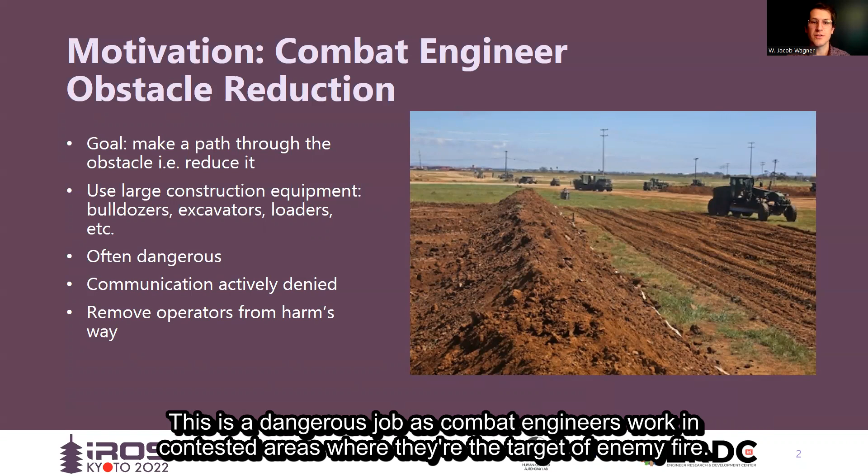This research is motivated by the needs of Army combat engineers who perform a variety of construction and demolition tasks, often using large construction equipment such as bulldozers. This is a dangerous job as combat engineers work in contested areas where they are the target of enemy fire. Teleoperation can reduce the risk to equipment operators.

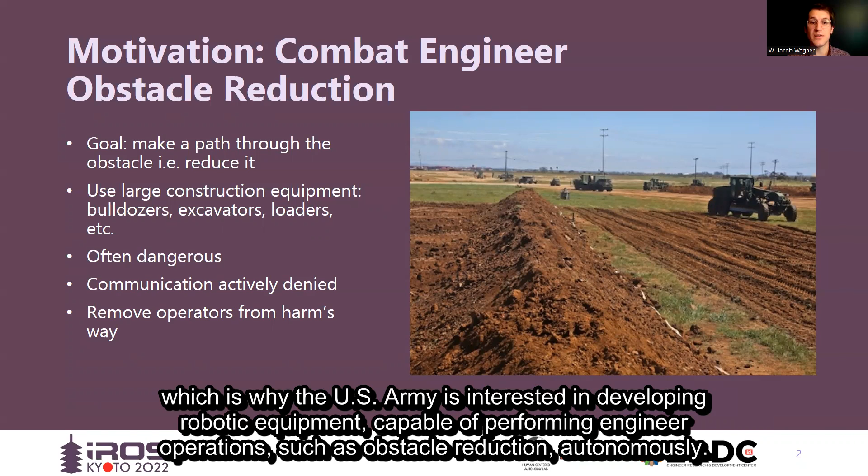However, it may not be possible when communications are being actively denied, which is why the U.S. Army is interested in developing robotic equipment capable of performing engineer operations such as obstacle reduction autonomously. Specifically, we focus on the task of earthen berm removal, an example of which is shown in the photo.

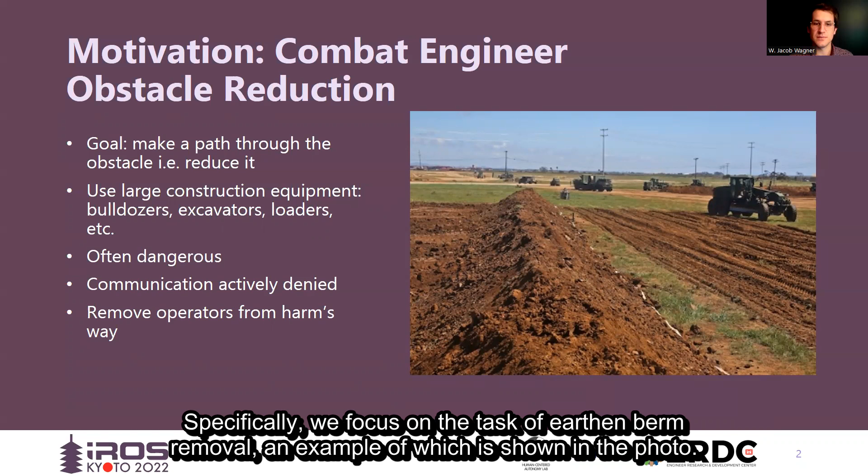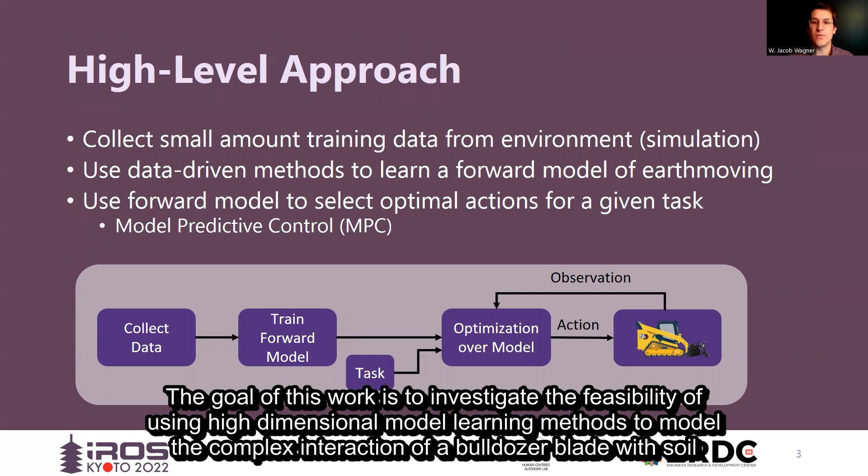The goal of this work is to investigate the feasibility of using high-dimensional model learning methods to model the complex interaction of a bulldozer blade with soil, and secondly, to determine if the learned models are accurate enough to enable removal of an earthen obstacle using predictive control.

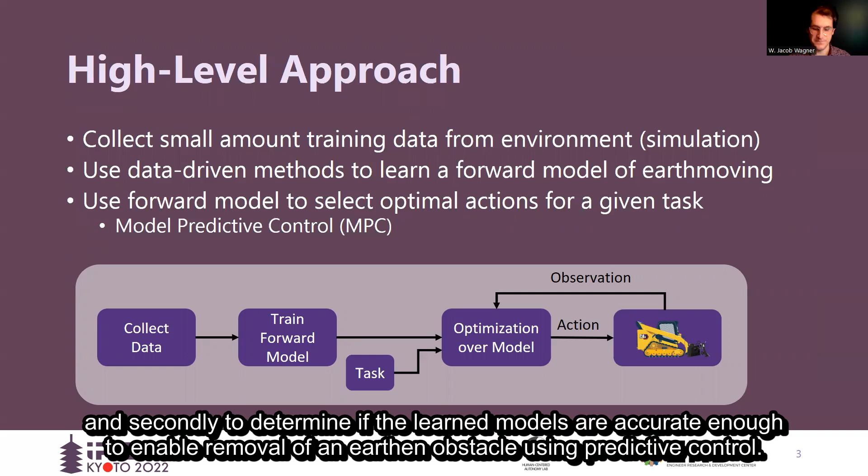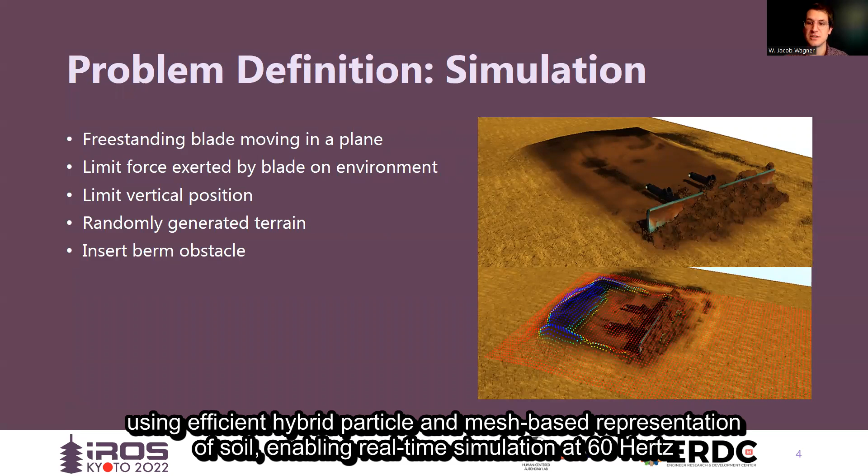We have developed a simulation of a bladed vehicle using Vortex Studio, which models both multi-body dynamics and soil tool interaction using an efficient hybrid particle and mesh-based representation of soil, enabling real-time simulation at 60 Hz. We use a simplified vehicle model consisting of a freestanding blade capable of moving in 2 dimensions, longitudinally and vertically.

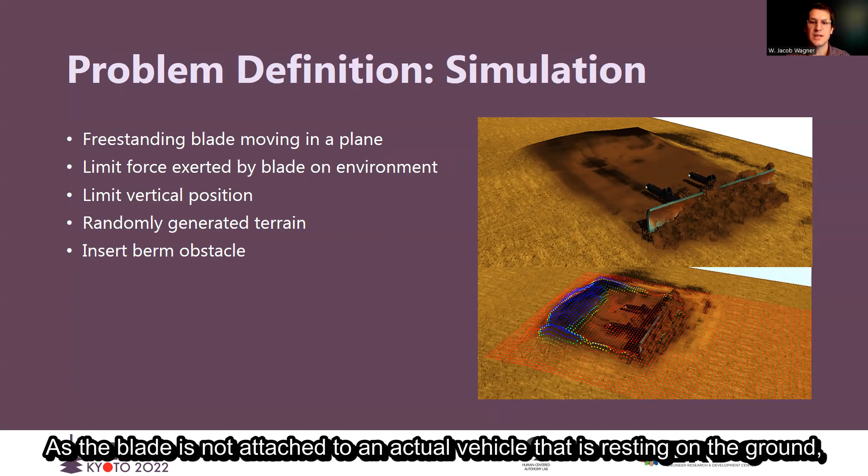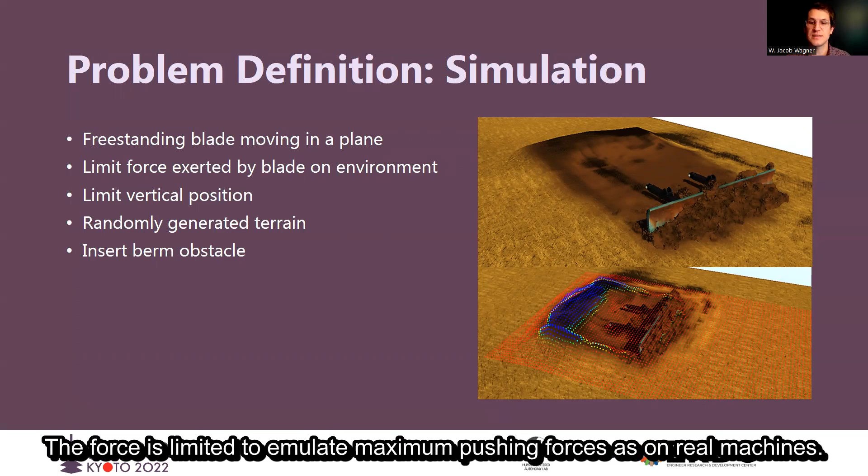As the blade is not attached to an actual vehicle that is resting on the ground, the velocity of the blade is controlled via a constraint, which exerts a force on the blade proportional to the velocity error. The force is limited to emulate maximum pushing forces as on real machines. The terrain is randomly generated using a mixture of Gaussians, and a 1 meter tall berm is in place for the system to remove.

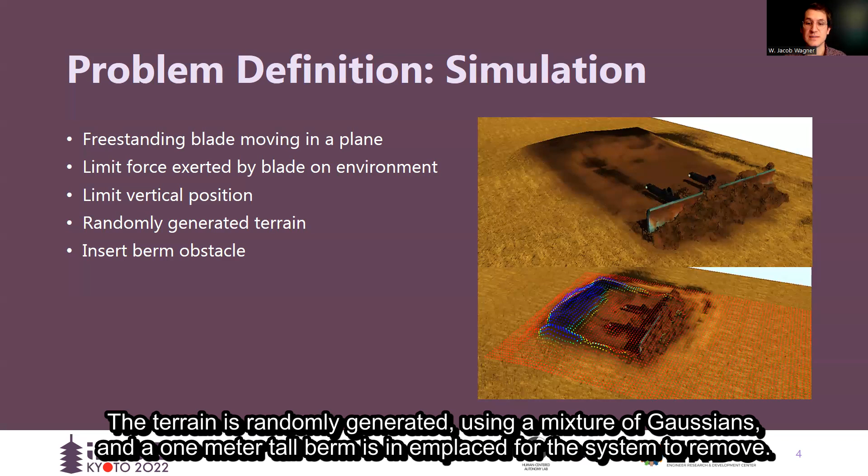The goal of the system is to move the excess soil out of the rectangular region of interest in order to achieve the terrain height prior to the berm emplacement, or PGZ. The system state includes a height map covering a 6 by 10 meter area centered on the current blade position, where height map values are relative to the height of the blade. The blade position and velocity are also included in the state. The blade velocity in the longitudinal and vertical directions can be controlled by the system.

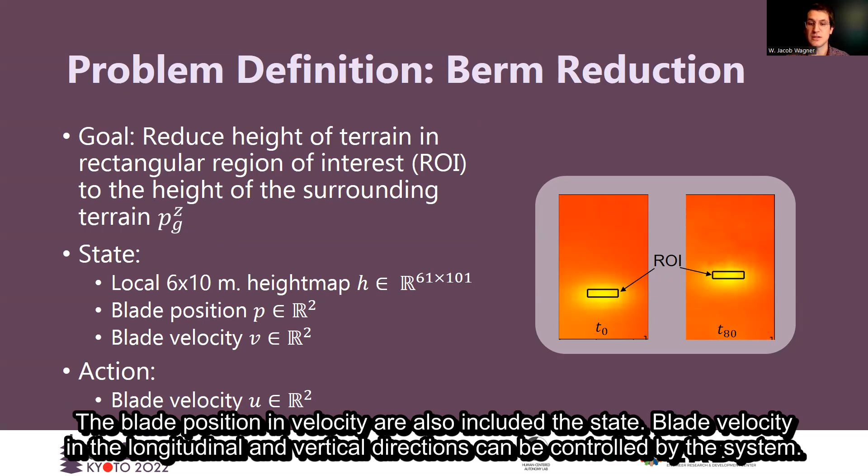We developed 2 different approaches to learning a forward model of the earth-moving process. Dynamic mode decomposition with control, or DMDC, is a method for learning reduced order models of nonlinear dynamical systems using only measurements of the state and control over time. DMD is particularly well suited to problems where the state encodes a spatial distribution of values.

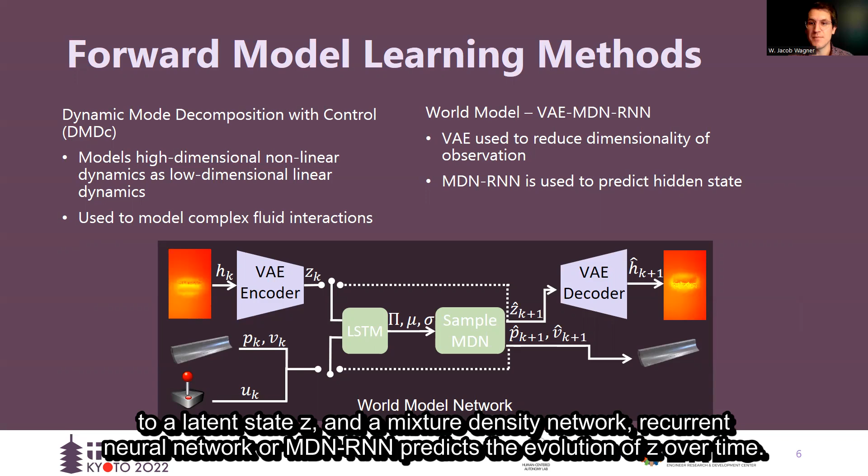The second approach we investigate is based on the world models architecture and is depicted in the figure below. The model is composed of 2 networks. A variational autoencoder, or VAE, reduces the dimensionality of the height map observation H to a latent state Z, and a mixture density network recurrent neural network, or MDN-RNN, predicts the evolution of Z over time. The VAE decoder can be used to turn a predicted latent state into the predicted height map.

To train the models, we collect a small data set consisting of 252 separate 2¼ second long trials where a human controls the simulated blade. This data set is separated into approximately 6 minutes of training data and 4 minutes of test data.

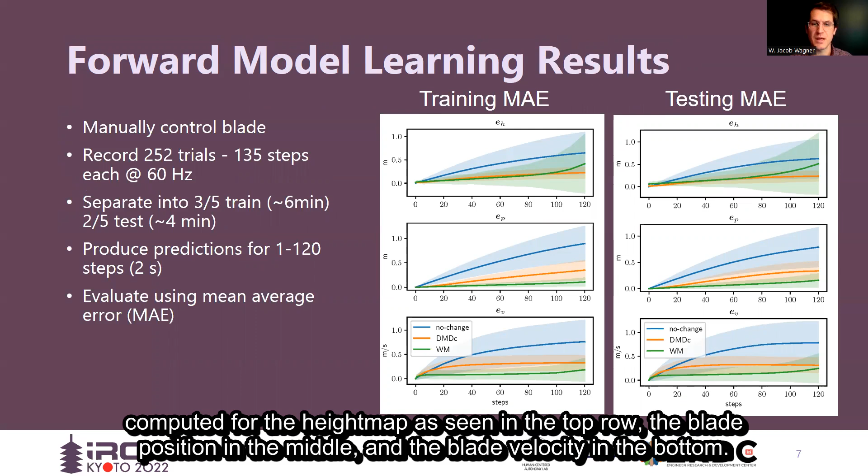After training, the models are used to produce 2-second predictions, and the mean average error of the predictions is computed for the height map as seen in the top row, the blade position in the middle, and the blade velocity in the bottom. DMDC does marginally better than world models on the height map predictions. However, it performs much worse than world models at predicting the blade position and velocity.

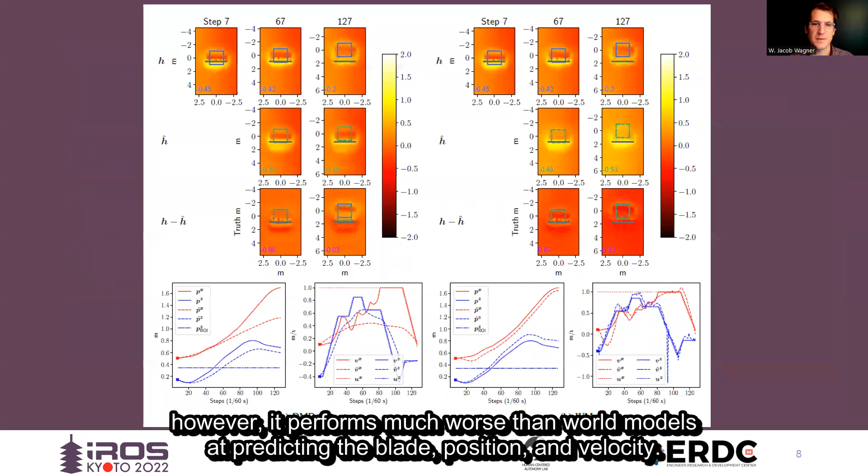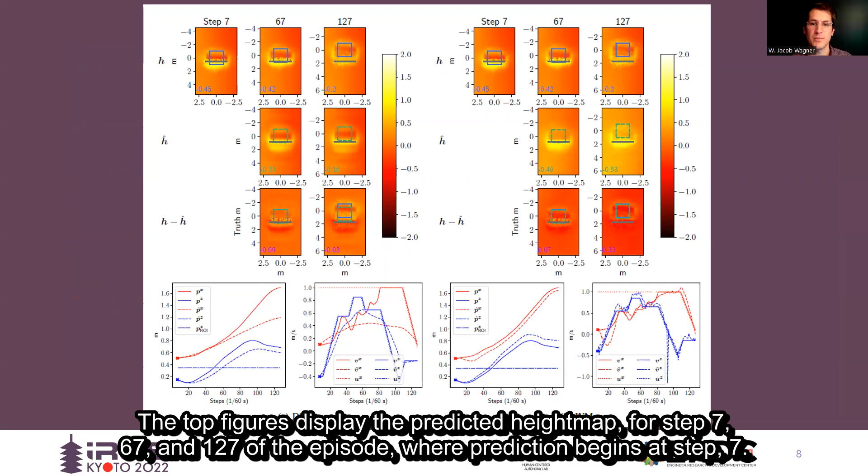This figure provides a more qualitative comparison of the methods. Visualizing the predictions for a representative episode, the top figures display the predicted height maps for steps 7, 67, and 127 of the episode, where prediction begins at step 7. The lower plots show both the position and velocity predictions as dashed lines and the true state as solid lines.

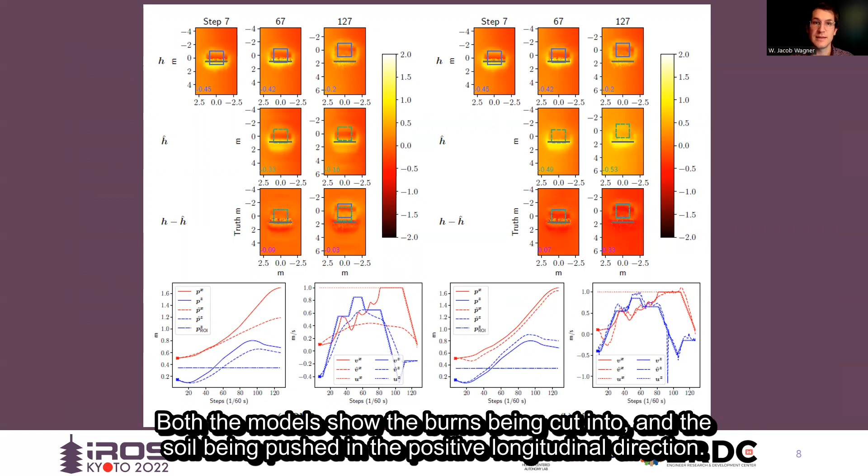Both models show the berms being cut into and the soil being pushed in the positive longitudinal direction. DMDC predicts less blade movement than is actually observed, while world models much more accurately predicts the change in position. Looking at the position and velocity predictions, we can see that world models is doing a much better job, especially for the longitudinal components.

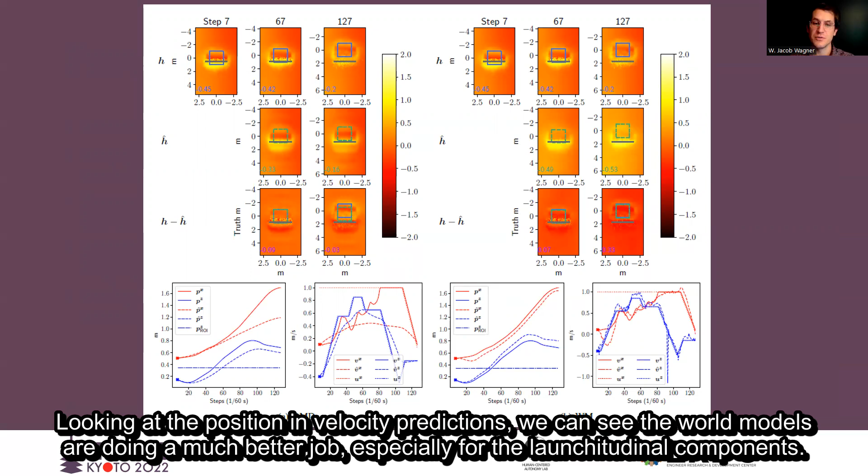After the models are learned, we are interested in using them to enable our vehicle to remove earthen berms. We formulate obstacle reduction as an MPC problem solved via moving horizon-based optimization. Instead of directly optimizing for the action at each step, we define a 2D template action trajectory motivated by the human operators and parameterized by 2 accelerations. This helps to reduce the size of the search space significantly, enabling the use of simple grid search for optimization.

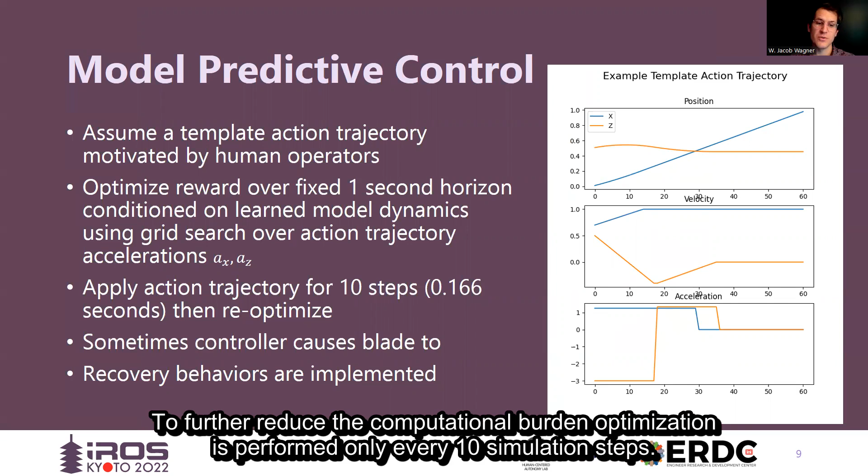To further reduce the computational burden, optimization is performed only every 10 simulation steps. Occasionally, this controller produces actions that bury the blade in the soil or raise the blade well above the terrain. We implement recovery behaviors that are engaged temporarily to help the system resume normal operation.

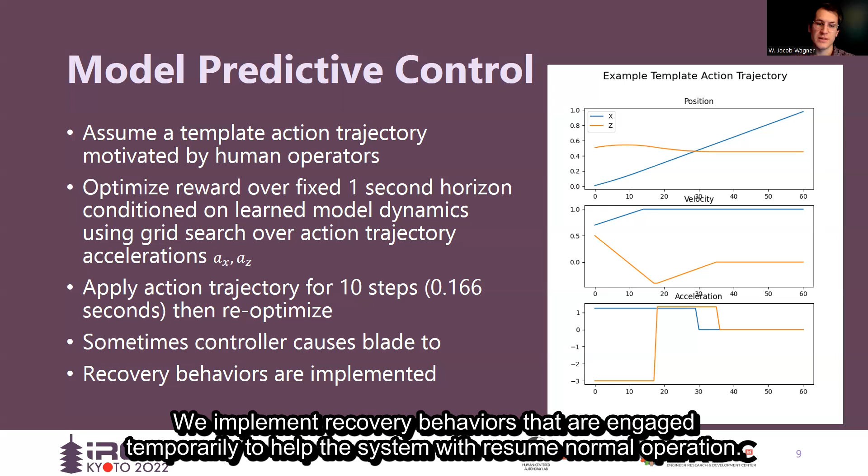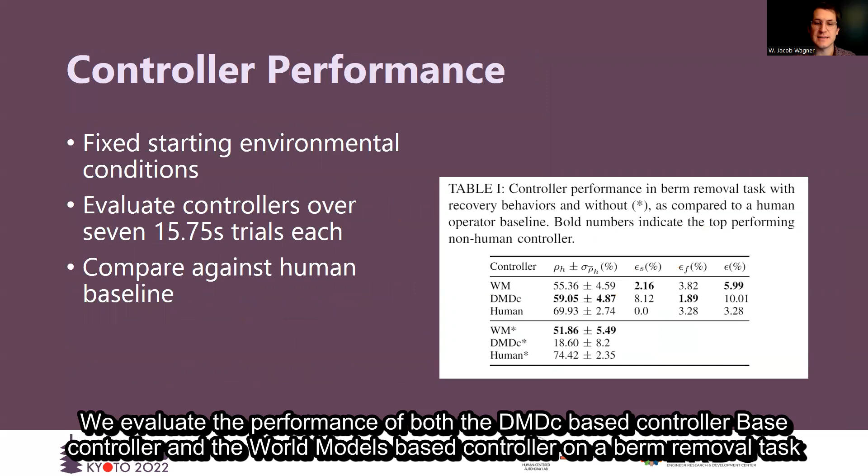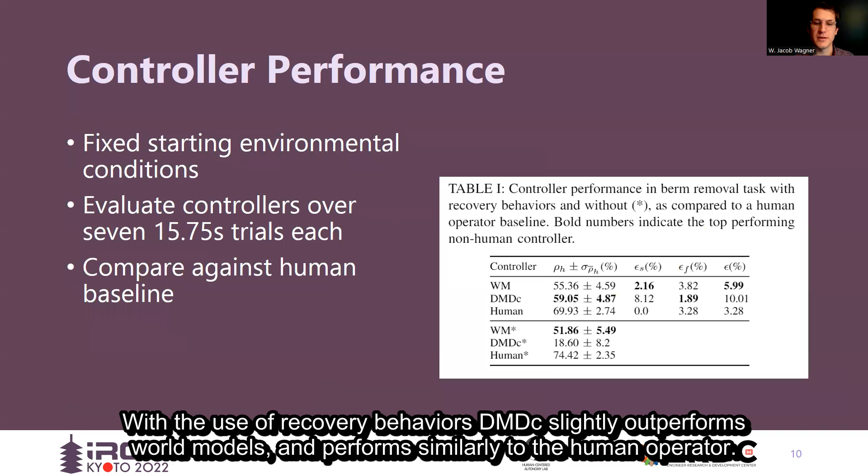We evaluate the performance of both the DMDc-based controller and the world models-based controller on a berm removal task as compared to the human operator baseline. With the use of recovery behaviors, DMDc slightly outperforms world models and performs similarly to the human operator. However, when recovery behaviors are disabled, DMDc performance decreases significantly, while world models only performs marginally worse.

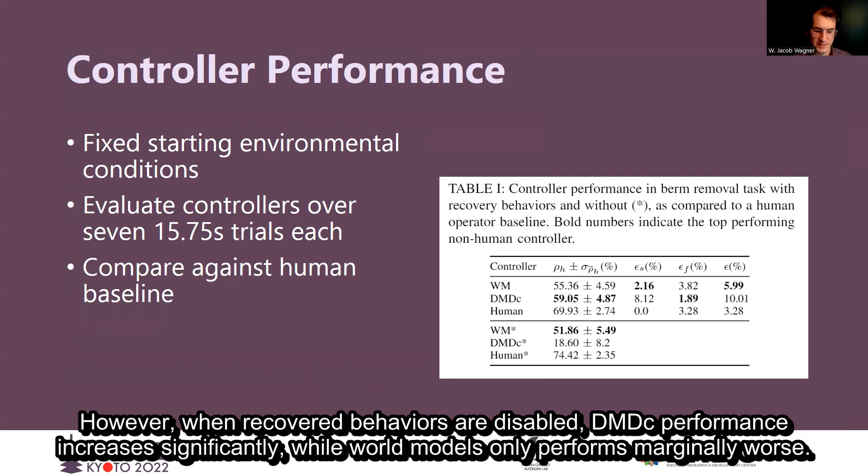As can be seen in this video, the DMDc-based controller consistently produces commands to drive the blade into the ground where the blade becomes stuck, and the recovery controller is needed to dislodge the blade. The world models controller, on the other hand, will often raise the blade after becoming stuck for a short period of time.

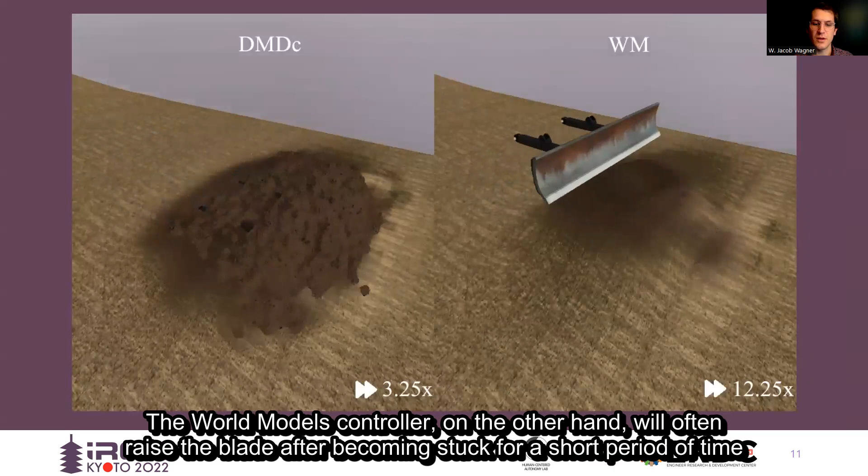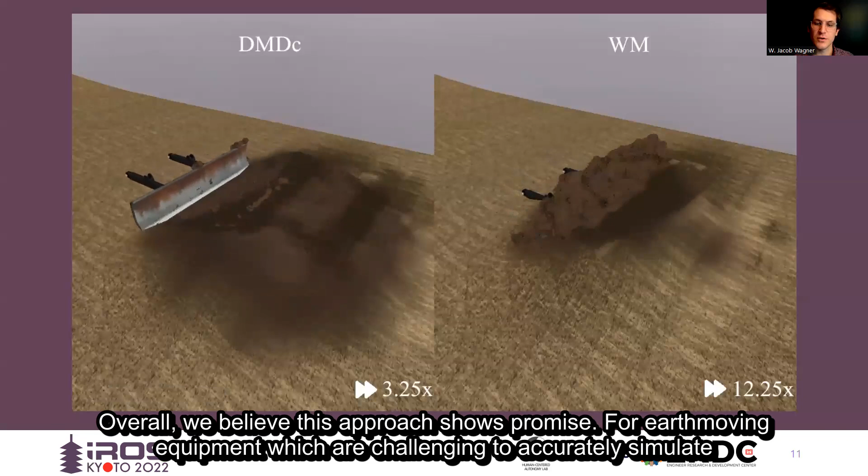Overall, we believe this approach shows promise. For earth-moving equipment, which are challenging to accurately simulate and for which it is difficult to safely obtain large quantities of real-world training data, this data-efficient model learning and MPC approach hints at a way learning-based control can be used to accomplish more complex autonomous earth-moving tasks.